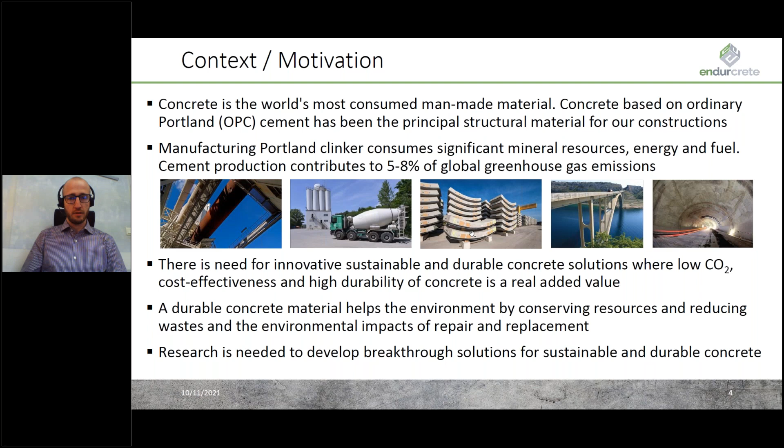So I will just move one slide. Can you move one slide down, please, for me? One more. The other side.

So we developed all these solutions independently first, but the big work of this consortium was also to combine all this technology into final solutions. And you will hear more about each of these technologies later in this webinar. Can we move one slide?

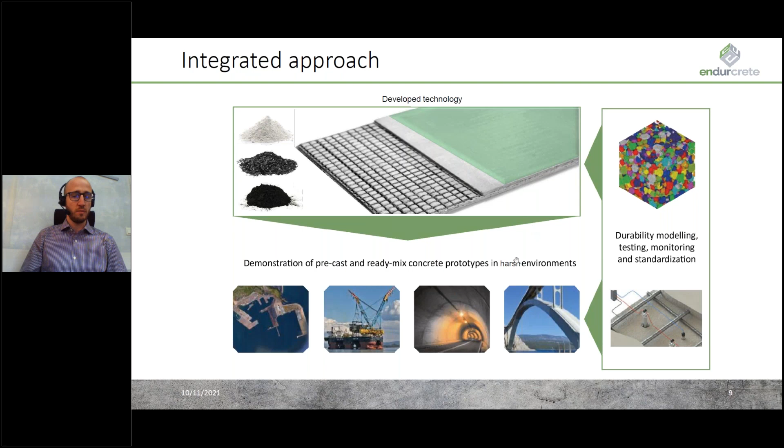And for that, we decided to go to exposure sites that you can see here on the slide. So we have chosen 4 exposure sites for our concrete solutions. One is here a tunnel exposure site in Spain. We have also some seawater exposure sites with submerged elements, tidal zone elements, and air elements. We have one site also in Norway, which is similar, but adding on top frost and very cold climate.

And then we have a bridge site in Croatia where you can see the placement of one concrete panel into this area. The idea is, of course, to validate all what we have developed in the lab into these sites. So you will again hear more from the dedicated partner later on during this webinar.

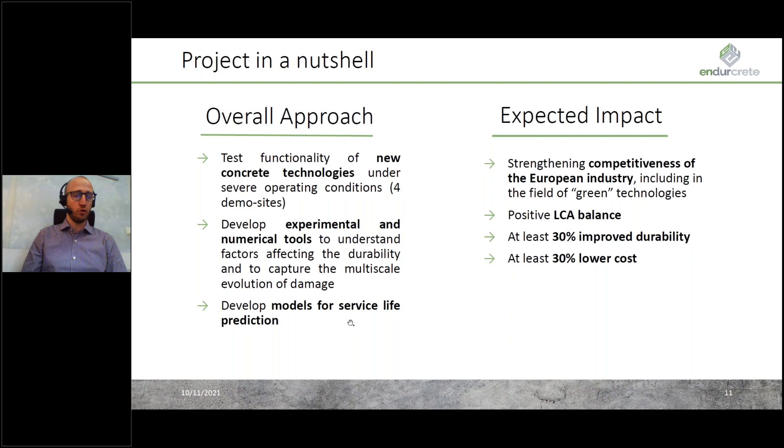So the expected impact is to develop more sustainable concrete and also more durable concrete, as you can see here on the right-hand side, and all of this to be developed together by this big consortium, making also experimental assessment and verification in the lab, in exposure sites, but also developing numerical tools to actually assess our technology also on the computer to have service life prediction.

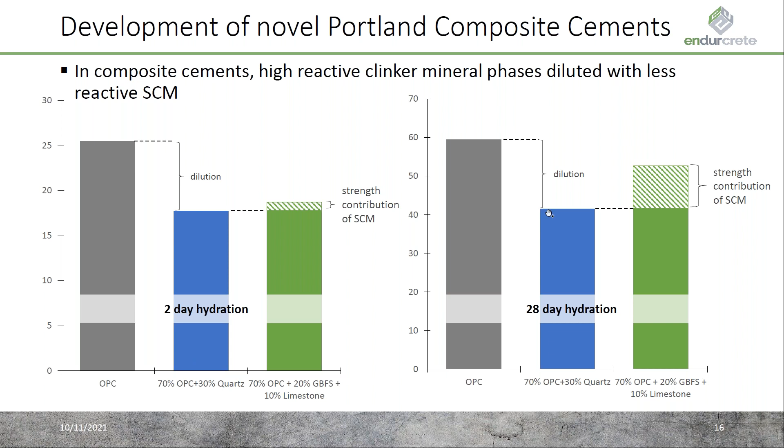If we take reactive materials, which are described in the cement standard, for example, granulated blast furnace slag in a mixture with 10% limestone, we have a very tiny effect on the early strength development by these constituents. But on the right side, you see the graph for 28 days. And after 28 days, we have a significant improvement in strength because of the reactivity of the slag in combination with the clinker and the limestone. But even there is a gap which we have to close.

And the way to close this gap, what we observed, is the technology of separate grinding of the materials. In the last 100 years, most of the constituents in cement were co-ground.

And now where we are looking for lower clinker factors, we have to go in the direction of separate grinding, which means we have to grind every material with respect to the grindability and the reactivity to the best fineness to replace at the end the most of the clinker.

If you work in such complex systems with 3 different materials in grindability and in reactivity, it will take a long time to find the right places where to place your recipe exactly. And there we designed a computer model where we end up with the result that, if we find the right fineness of the material, we can replace 40% of the clinker by a mixture of 30% slag and 10% limestone without significant impact on the cement performance.

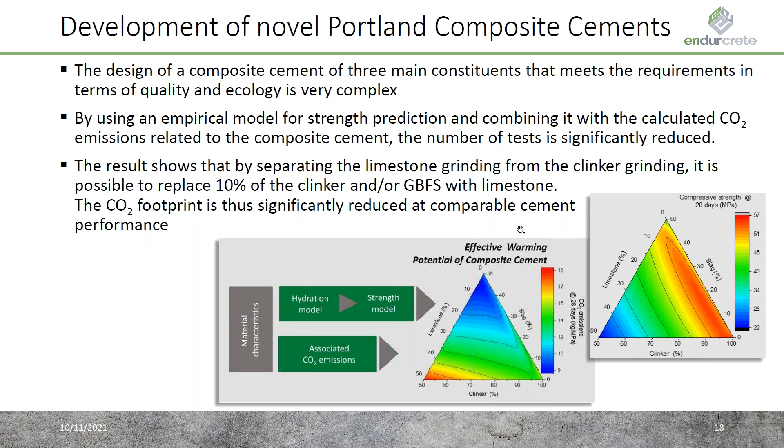And at the end, I would like to show you here the result when it comes to recipe and to the strength development in our project work here. And these are the CEM II/C-M cement and the CEM VI cement, which we then delivered to the partners in this project for all the tests and durability aspects tests and for the demo sites, where we will get the presentation now from my colleagues. That's from my side for the moment.

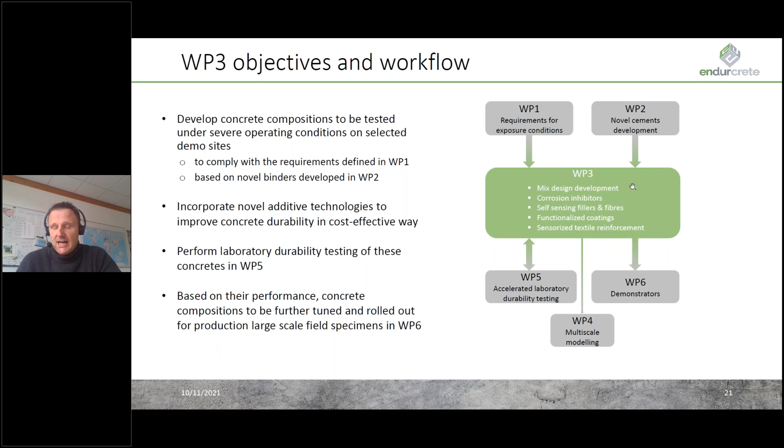This concrete was then tested in work package 5 for durability in the lab. And then we upscaled the concrete production in work package 6, produced the elements to be placed at 4 different demo sites. The whole development went into 3 basically simple steps.

In step number 1, what we try to do is to develop EnDurCrete mixes with novel cements only, which were developed in work package 2. And the development of concrete recipes was based on our design and production requirements, which we got from work package 1. And the end result was basically 3 different concrete types containing the new cements: a marine concrete mix, intended to be tested at 2 marine demo sites, one in Spain and the other in Croatia. We have one tunnel mix intended to be tested at the tunnel demo site in Spain. And we have developed one offshore concrete mix to be tested for offshore application at the demo site in Norway.

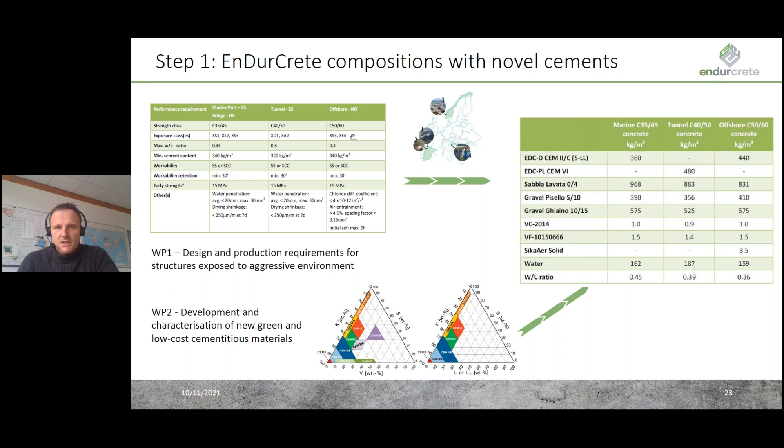Then in the second step, we try to incorporate these novel additions and additives into existing concrete compositions. But before we did that, we try to figure out the impact of these additions on fresh and hardened properties of the concrete. The focus was on workability and strength development, and we try to incorporate a nanoclay corrosion inhibitor and 2 types of carbon-based materials, biochar and recycled carbon fines.

And the study on the compatibility of these additives with the concrete was done by Sika, and what they figured out is that these additions have a negative impact on the workability, and this problem was solved by Sika. They provided tailor-made polymers and admixtures to solve these concrete performance issues. When it comes to the strength development, we saw that the carbon-based materials have more or less no impact, but the nanoclay corrosion inhibitor has a negative impact on the strength development. So for this reason, we decided to only test this nanoclay at one demo site. I'll get back to this on one of my next slides.

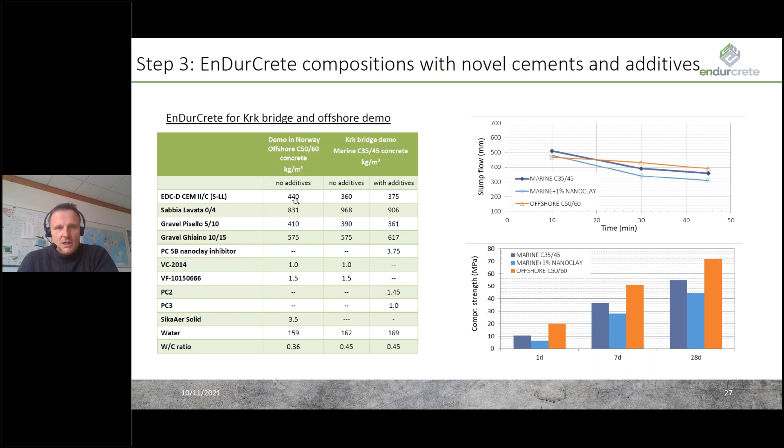When it comes to the offshore concrete, the impact of the nanoclay was even bigger. So for this reason, we decided only to test the composition containing novel cement. This is my last slide, just to tell you that in the scope of this work package, we haven't only developed concrete mix designs, but we also helped with preparation for the lab testing in the scope of work package 5 and the rollout of developed solutions, which occurred in work package 6.

Okay, so good morning, everyone. Today I'm going to explain what we have done so far within EnDurCrete and the nano inhibiting additives for corrosion. iBox is a consulting micro SME located in Valencia, Spain, and we are focused on developing maritime port technologies through two research and development areas. The first one is advanced materials, and the second one is wave energy.

All this activity has granted iBox recognition from the Spanish Ministry of Innovation with the Innovation Seal since 2015. Our product is a corrosion inhibiting additive, and the knowledge on these nano inhibitors is based on the development of a former company called CIES Infraestructuras, which disappeared. But before disappearing, we signed an agreement with them in 2014, where iBox would be in charge of all the technological development and exploitation of the corrosion inhibiting additive.

Our inhibitor prevents the occurrence of corrosion processes in structures exposed to marine environments or in areas where de-icing salts are used. We achieved the Spanish patent, which was published in May 2019. This is the full background, and now let's go to the project.

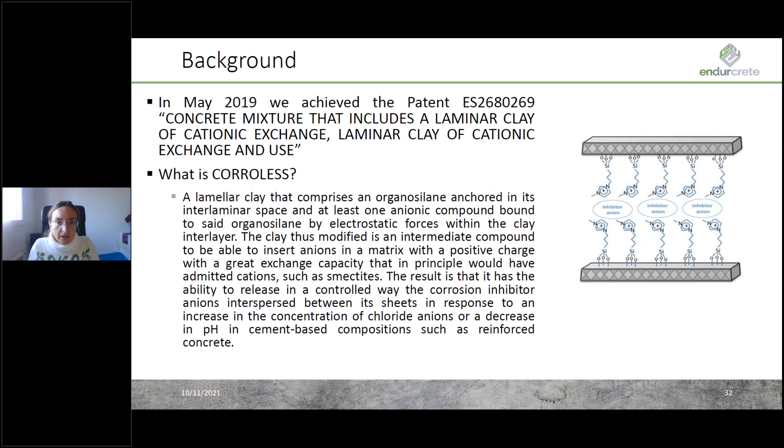iBox participated in task 1. During this task, we reviewed the requirements of regulations specifically for the marine environment. Our main task was in work package 3. We were leading task 3.1, named Development and Optimization of Smart Corrosion Inhibitors based on nano-modified clays. The aim of the task was to develop and optimize the novel additive to be implemented in concrete mix designs, developed specifically to comply with the requirements defined in work package 1.

For a competitive product, the inhibitor had to be a maximum of 1% of cement weight. The price will be less than current commercial solutions, around €2 per kilogram, and the performance will increase the lifetime of the concrete, or the time it takes corrosion damage to appear, up to 3 times.

During the task, the goal was to optimize the proportion of modifier and corrosion inhibitor to fit the concrete requirements and not modify the hydration kinetics of cement, which was a problem. In this sense, with the help of Sika, we reduced the amount of silane modifier and anion corrosion inhibitor, and it was possible to prepare a product. Out of 7 samples, we achieved 1 sample that did not delay the hydration kinetics of the cement.

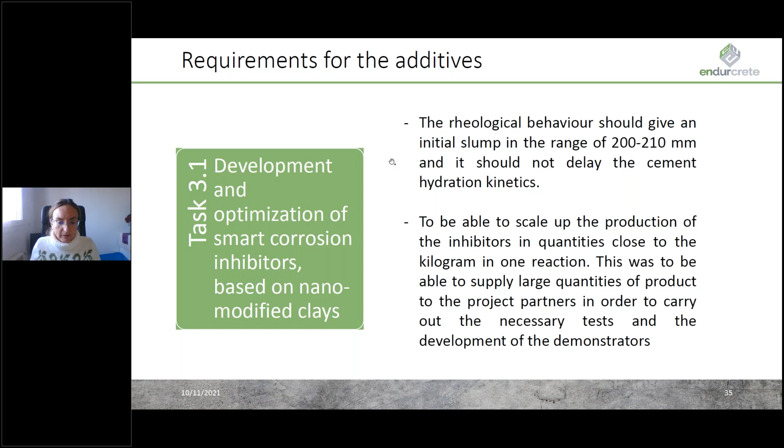And again, the main work was to find the proportion of modifier and inhibitor so that they were optimized. So during this work package 3, the technology was tested in concrete, and it was proved with anti-corrosion properties and did not have any negative effect on mechanical resistance and other concrete properties at first. But afterwards, it was decided that there were some constraints, and it was only going to be proven in marine environment and not in offshore.

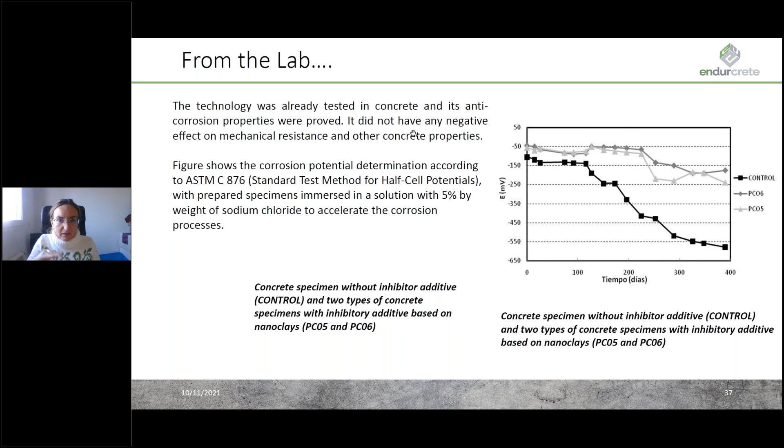To sum up, work package 6 will be explained later by our colleagues from Acciona. But then in this upscaling, the inhibitors were ready, and it was time to start with the pilot scale. And the first challenge arose during the upscaling, and was that the energy consumption during the production process was high, and we had to optimize that.

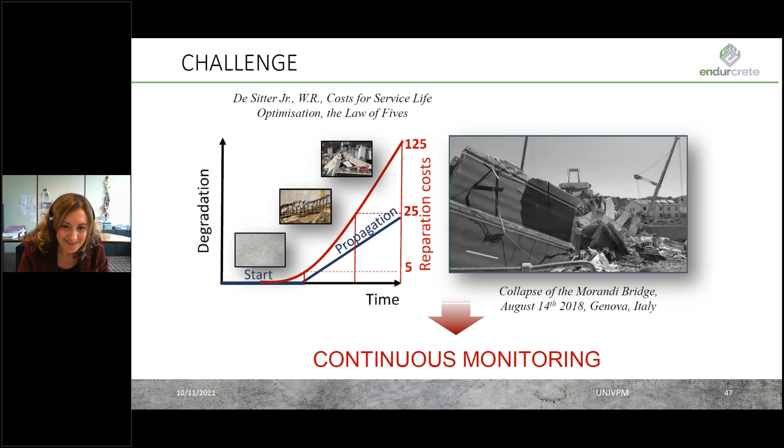Sorry, but I have some problems with the control of the presentation. I'm not able to move up and down. Just tell us when you need the next slide.

Thank you, Max. So in this context, self-sensing is the ability of a material to perceive its own condition, such as cracking, water and aggressive substances penetration, and strain, by simply measuring its electrical resistivity. Compared to other traditional monitoring systems based on a multi-sensor approach, self-sensing concrete is able to detect multiple phenomena in a cheaper and less complex way. Please, next.

The self-sensing concrete properties can be enhanced by decreasing its electrical resistivity with the addition of conductive admixtures. In fact, in this way, giving a higher signal to noise ratio, low-cost instrumentation can be used with the possibility of creating real measurement networks with nodes distributed on the whole structure. Next, please.

Carbon-based additions are excellent for self-sensing concrete. However, those actually available on the market, such as carbon black, carbon nanotubes, graphene, and carbon nanofibers, are not sustainable, very expensive, and sometimes very toxic. Next, please. Next.

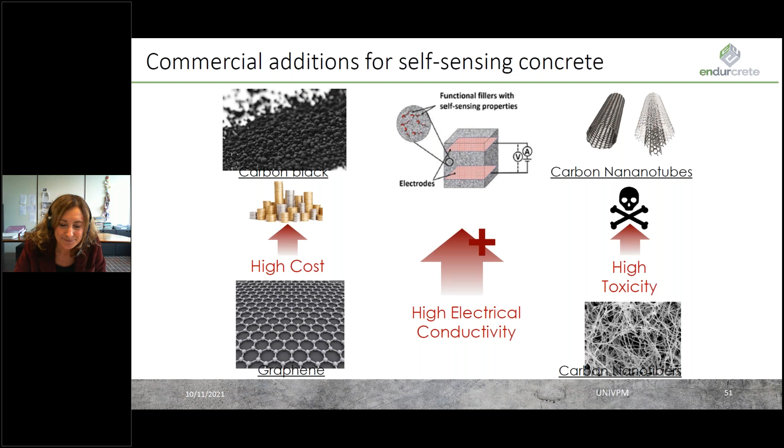Therefore, in the EnDurCrete project, these commercial carbon-based additions for self-sensing concrete have been replaced by innovative, low-cost, carbon-based byproducts, such as biochar by thermal treatment of biomasses and recycled carbon fibers by cutting and milling carbon fiber panels and fabrics. Next, please. Next.

The experimental results have shown that the joint use of these low-cost fillers and fibers does not significantly affect the mechanical performance of concretes. Next.

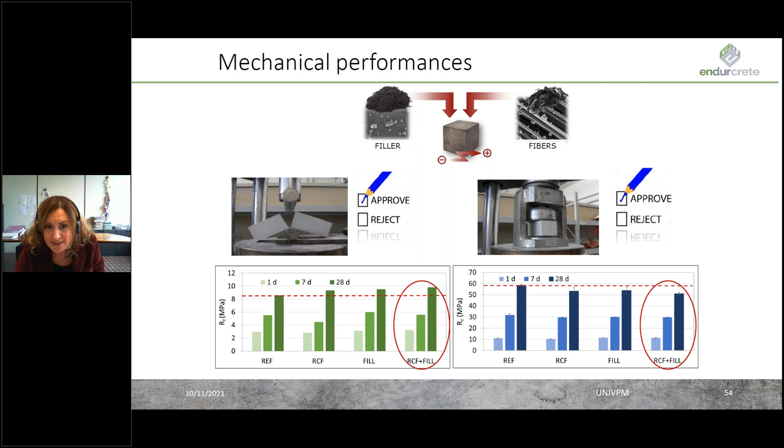They decrease its electrical resistivity, giving the possibility of exploiting the self-sensing performances of concretes in terms of carbonation, chloride penetration, and water absorption.

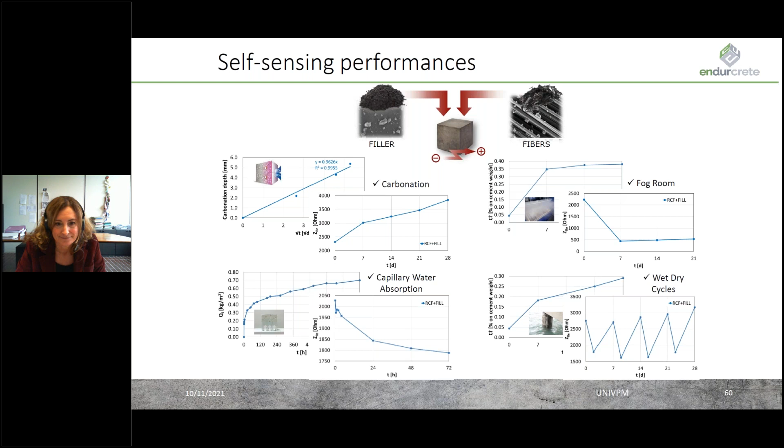A mobile application has been also developed, which after selecting the demo site, the concrete panel, the parameter and the time interval, shows data as a graph that can be saved in a CSV file to be sent via mail.

Results related to the data acquired for approximately 10 months confirm that the signals measured in the panels with conductive additions have a higher signal-to-noise ratio with respect to those measured in the panels without additions, confirming the results obtained at lab scale. The low-cost monitoring system did not show any faults during the demo test activities, and finally, data were not affected by any issues due to the aggressive exposure.

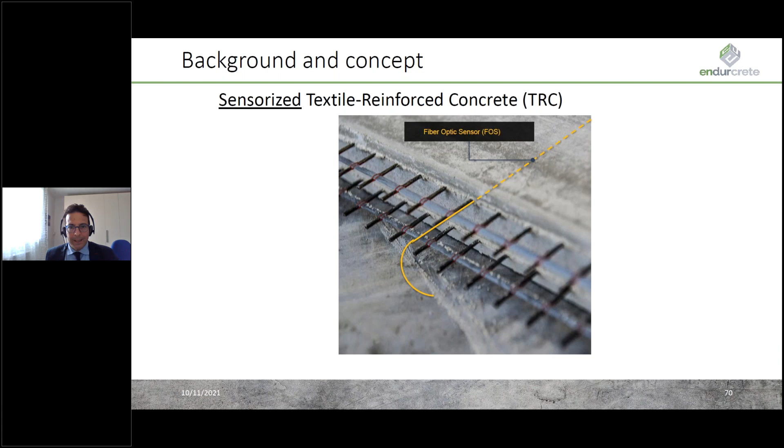Textile reinforced concrete is an innovative cement-based composite material exploiting the non-corrosive nature of fiber materials for realizing slender and durable concrete elements. And in the EnDurCrete project, we further innovated this concept by embedding a fiber optic sensor inside these panels, and so providing them with a built-in structural monitoring capability.

The final goal is to realize a modular sensorized solution like this that you can see in the slide, so that when you are on the field for installation, you just have to connect the two adjacent panels by means of an external optical patch cord.

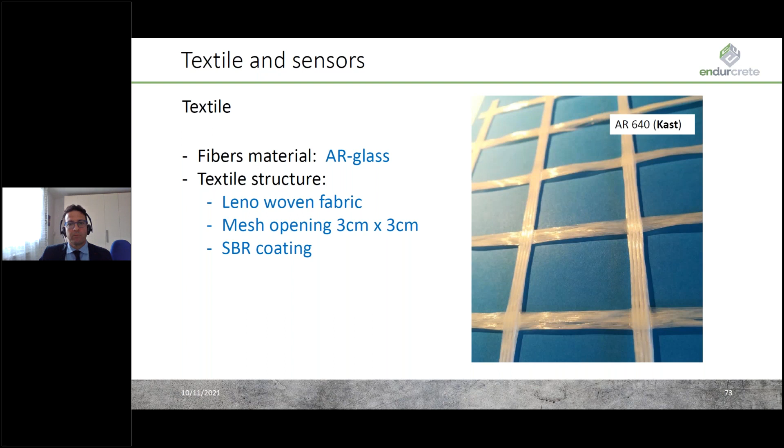Let's have a look to the components of the system. The textile is made of alkali-resistant glass with a mesh opening of 3 centimeters, while the sensor system is made of 2 distinct cables. Here they are. The blue one is a strain-sensitive cable with roughened surface for a better adhesion with concrete, while the red one is a strain-insensitive cable for thermal compensation.

So, in order to set up the production technology and to characterize the performances, we designed and produced 2 samples. The sample A is the reference one, made of ordinary reinforced concrete, while sample B is similar to sample A, but with the replacement of the steel net with the textile.

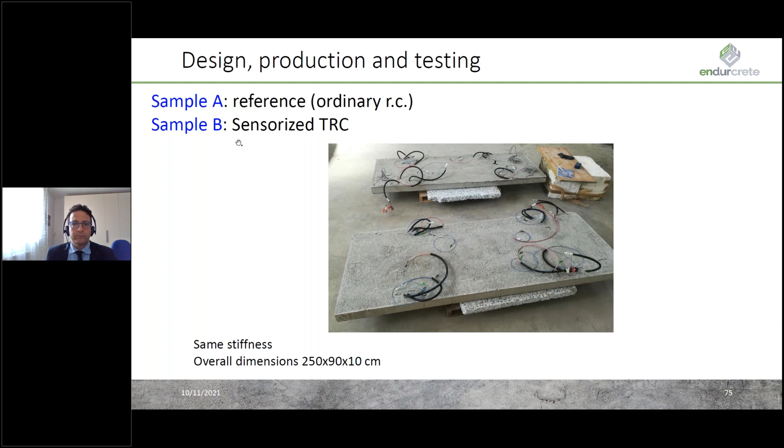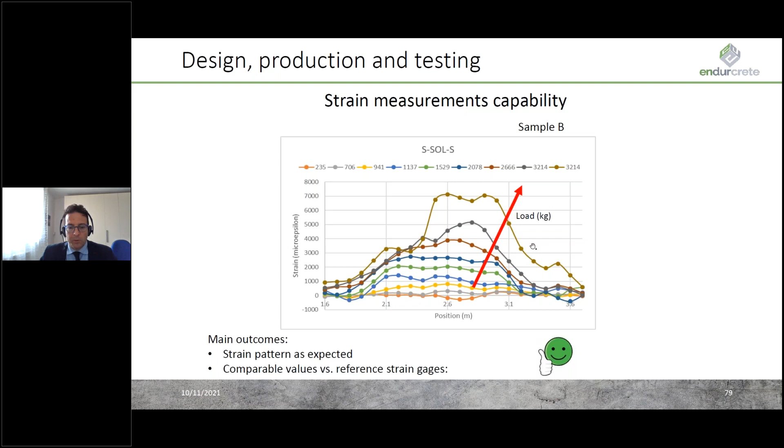The panels were then tested in 3-point bending test. Here you can see some details of the setup, and here the main results, namely the strain profile along the panel at increasing load. We can comment that the strain pattern shape is as we expected it, and also that the strain values we measured are comparable with those obtained by reference electrical strain gauges.

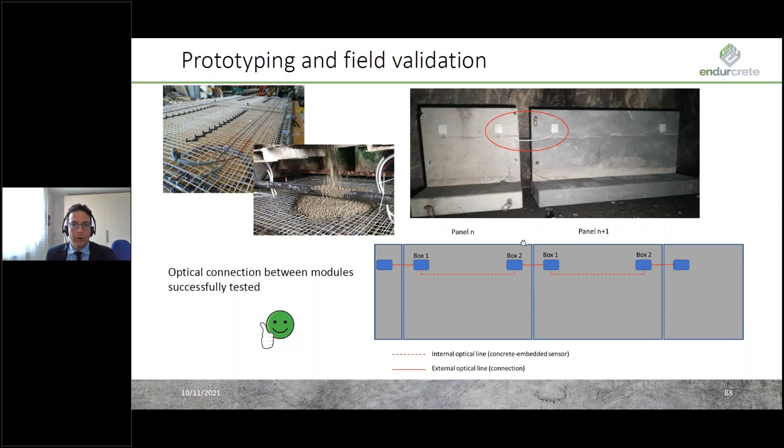So the final step of the work was the production of two prototypes, modular prototypes conceived for a tunnel application. Here you can see some pictures of the production, and here are the two modules placed inside the mining tunnel in Spain. And here you can see the optical connection between the two modules, which was successfully tested. So this was actually a real demonstrator of the concept I mentioned before. So let's go to draw some conclusions.

We developed and tested textile reinforced concrete panels sensorized with distributed fiber optic sensors, with the final goal to develop a modular concept of self-sensing components. We found that the sensors survived the production process and provided consistent data up to advanced cracking stage. Also, the TRC solution provided enhanced ductility and load carrying capacity. And finally, we demonstrated this technology by large-scale prototypes in real tunnel environment.

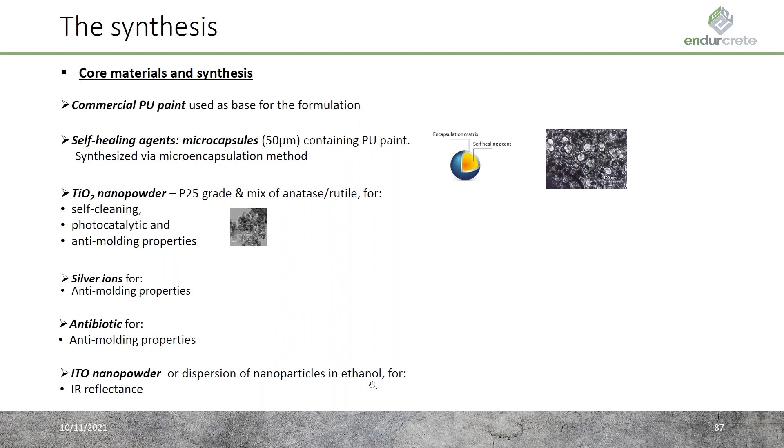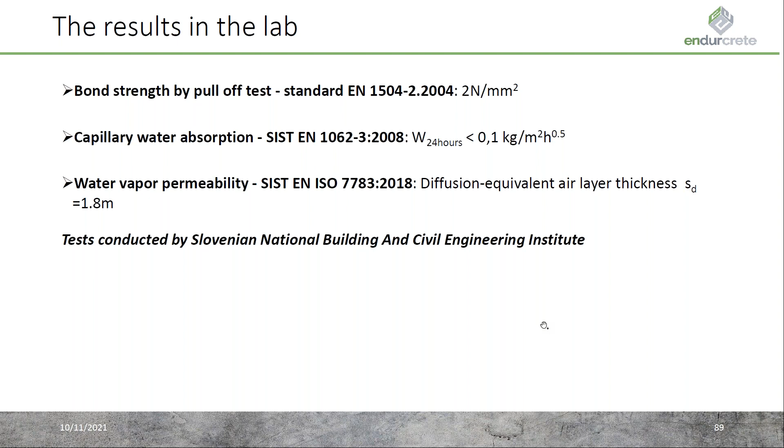Moreover, the Slovenian National Building and Civil Engineering Institute, ZAG, conducted bond strength, capillary water absorption, and water vapor permeability tests on the coatings that showed acceptable results in every case. And finally, the evaluation in real environment is ongoing at the moment.

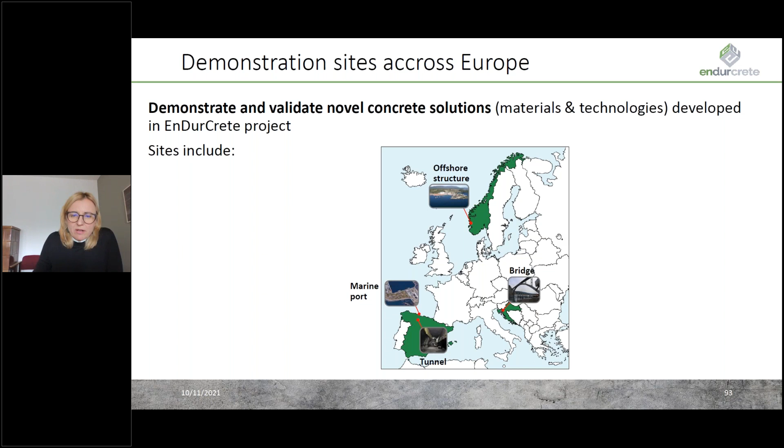Thank you very much, Susanna. First of all, I'm presenting in the name of the large group of partners and people involved in the organization and performance of the demonstration sites, as we will see in the next slide. We have already seen in the first presentation by Arno that we had 4 demonstration sites across Europe, representing demanding and quite different environmentally challenging locations and different types of structures. So we have involved the Mediterranean climate, the ocean climate and Nordic climate, structures exposed to the marine environment, as well as the tunnel structure exposed to carbonation and chemical attack.

The purpose of the demonstration projects, as also mentioned before, is to test the EnDurCrete technologies, which included different types of cements, different types of additions or admixtures used in the concrete production, such as corrosion inhibitors, carbon-based green microfillers, textile reinforcement, and multifunctional protective coatings. We have used at the sites different sizes and types of specimens, so we tried to simulate larger structural elements, but we also added a large number of small specimens which are used for monitoring and the determination of mechanical and durability properties over time.

And at all sites you will see there are different monitoring techniques involved, either through embedded sensors or embedded fiber optics, as well as environmental sensors for local climate monitoring, and then non-destructive and destructive testing of the smaller specimens. The first site I will present is the offshore platform in Norway, which was led by Kværner, now Aker Solutions, and the contributing partners were ZAG, Acciona, RINA, AM Solutions, and Nuatesi System.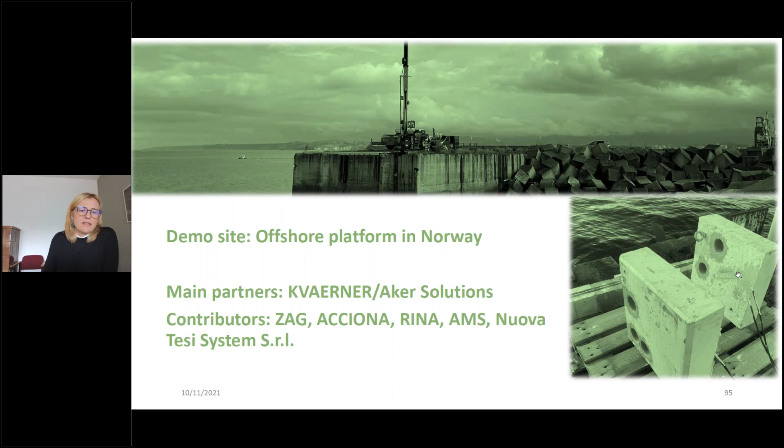The demonstration site in Norway was located in South Norway at a marine location, and it included 2 types of offshore concrete: the EnDurCrete offshore concrete with newly developed cements, CEM II/C-M (S-LL), compared to the reference offshore concrete, CEM I 52.5R plus an additional 5% of silica fume. Just a small note, the reference concrete was a little bit unfair, I think, to the EnDurCrete concrete, but we can discuss it later. The water binder ratio was also very low, 0.46, with relatively high binder content.

We could say there are 4 exposure zones: 3 marine exposure zones, XS1, XS2, XS3, and additionally frost, as in the coldest months the temperature goes down to -8 degrees. There were 15 concrete panels exposed, with a size of 50 by 50 by 15 centimeters. Those panels included different technologies: textile reinforcement with optical fibers, corrosion and electrical resistivity sensors, and different types of coatings. Additionally, there were cubes located in all those different environmental conditions.

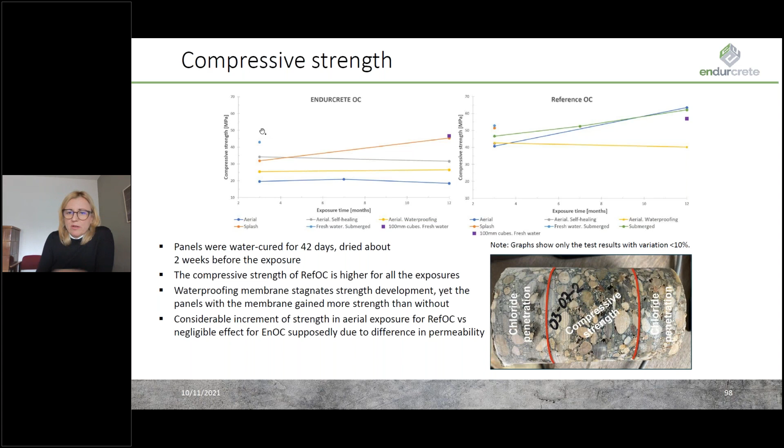So generally, the EnDurCrete offshore concrete had a lower permeability than the reference concrete, and the total air content was varying between 5 and 6%, which is a very good prerequisite to be frost resistant. Chloride penetration tests showed no apparent difference in chloride penetration between the offshore reference and offshore EnDurCrete concrete after 12 months. The highest chloride content was measured in the splash zone and the submerged zone. The treated panels also show minor presence of chlorides up to 5 millimeter depth.

The measurements using the electrical resistivity sensors performed by ZAG did not show any significant corrosion activities. And contact angle measurements of the waterproofing membrane, which were performed by Acciona, showed good wettability of the surface, implying that its hydrophilic properties are as expected.

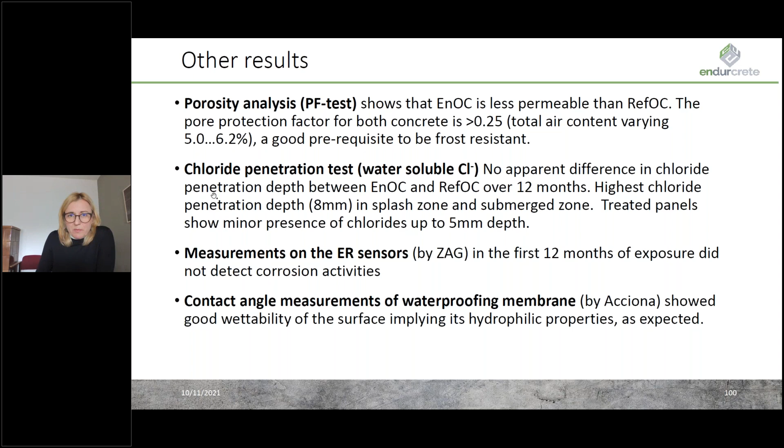The second demonstration site is a marine port in Spain, which was led by Acciona, and contributing partners are Nuova Tesi System, AM Solutions, iBox, Vito, Heidelberg Cement, and Sika. The location of the demonstration site, as you can see, is in North Spain, exposed to ocean climate. The prototypes of the samples were installed in a concrete dock called Port Gijón, El Musel, Spain, supported by the Port Authority and coordinated by Acciona.

We can see on this slide how the steel frame was used for holding the panels in different zones, from aerial zone, tidal zone to the submerged zone. In this site, two cement types were used. First of all, the reference cement was CEM III/A 42.5N, and the EnDurCrete cement CEM II/C-M (S-LL). Additionally, the technologies developed in EnDurCrete were used: polyurethane coating, corrosion inhibitors, and biochar with recycled carbon fibers.

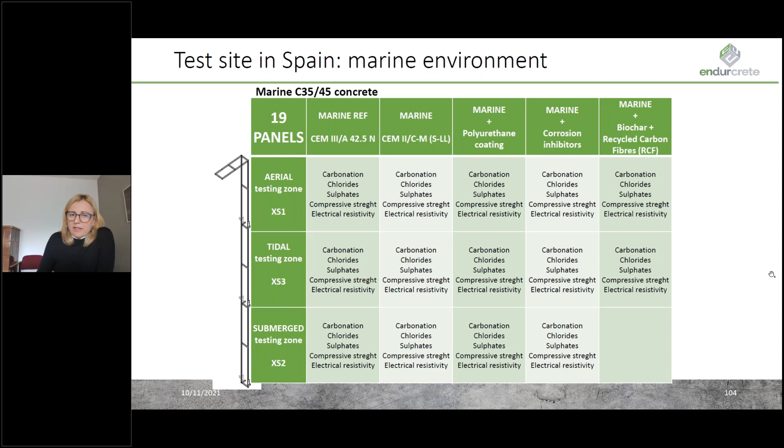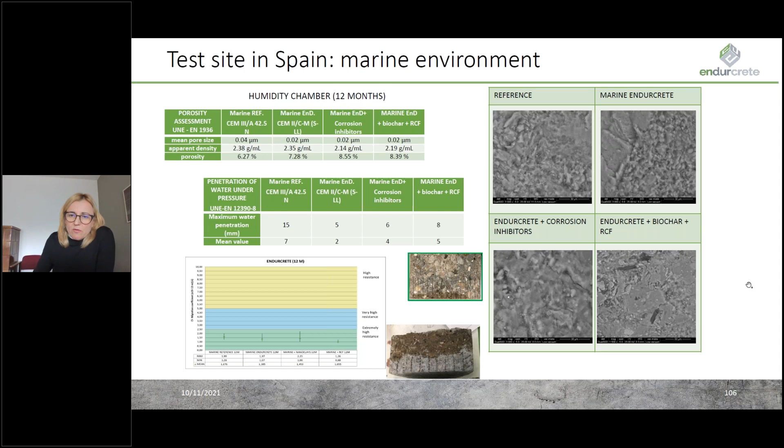So additionally, we can here see the results of the porosity and density and mean pore size. Most important is that both concretes performed really very well. Also, the water penetration was much lower compared to the reference concrete. In the SEM scans, we can see no significant difference in the microstructure, and the overall impression is that EnDurCrete concrete had very low permeability.

So in summary, no sulfate penetration was recorded in splash and tidal zones, and in the submerged zone, the best results were with EnDurCrete concrete with CEM II/C-M (S-LL). The same was for chloride penetration. The better results were recorded with the EnDurCrete concrete in all zones, as well for the carbonation. The bulk resistivity showed a moderate risk of corrosion for the reference cement and very low risk of corrosion for the EnDurCrete concrete. And in the SEM scans, there were no significant differences.

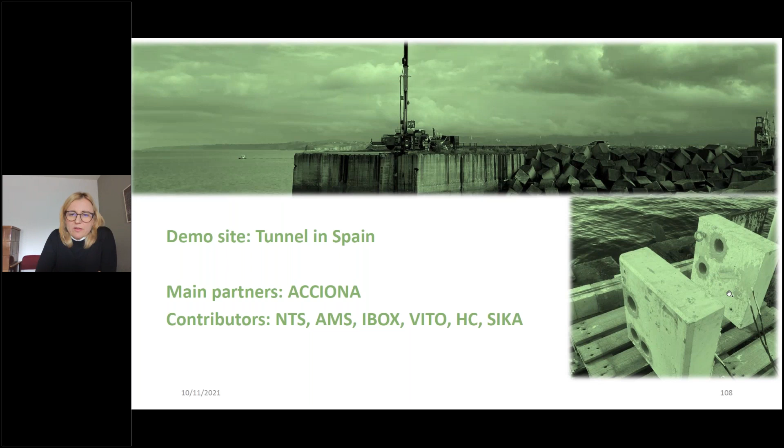The next one is also the demo site in Spain, again led by Acciona and supported by Nuova Tesi System, AM Solutions, iBox, Vito, Heidelberg Cement, and Sika partners. The tunnel is a publicly owned tunnel, which used to be a coal mine, but it's out of service, and it is used now as a research center and for investigation of different excavation techniques, spraying, shotcrete, etc. We have used it for placing our tunnel elements, as Paolo has presented already, representing the exposure classes XD1, moderate humidity, and XA2, moderately aggressive chemical environment.

We can see here the preparation of the samples. The preparation included the usage of the textile reinforcement and fiber optic sensors. This is the two-stage loading before placing the panels in the tunnel. As well, initialized cracks were performed in order to test the computer vision technique for detection of the crack location and the width. And as well, the device for measuring the surface roughness was applied.

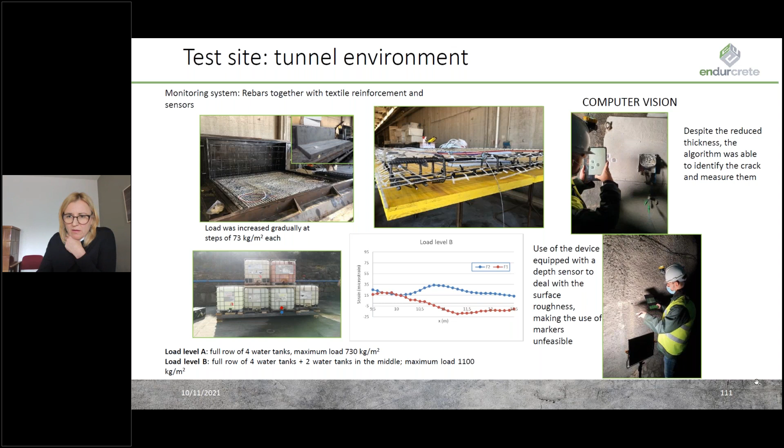to the frost. And as well, the penetration of the water was much better, or no penetration at all recorded with the tunnel EnDurCrete concretes, as well with the addition of the biochar, comparing to the tunnel reference concrete. No sulfates penetration was found in any of the mixes, and as well the SEM scans showed no significant differences at the microstructure level.

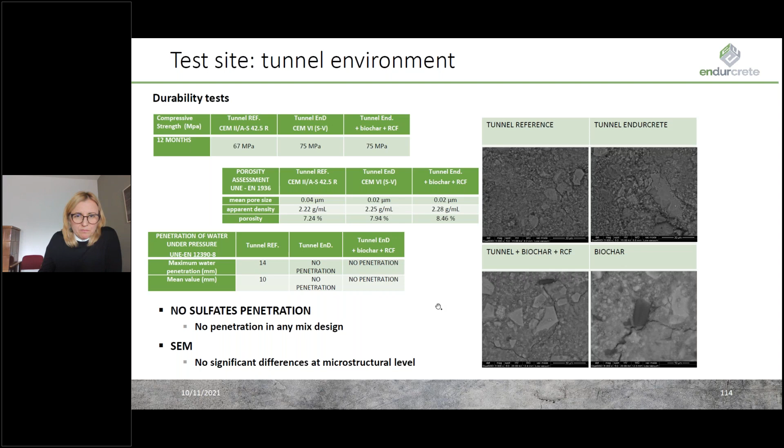The 5 materials were used at this site, so there were 3 cements, both presented in the tunnel and the marine environment, so 2 EnDurCrete cements, and additionally 1 set of samples was coated with 1 polyurethane coating, and we had 2 reference cements as well used for the marine and the tunnel environment. 2 types of corrosion sensors were used, so coupled multi-electrode system and electrical resistivity, which will be shown on the next slide. We have 3 zones of exposure: submerged, tidal, and the splash.

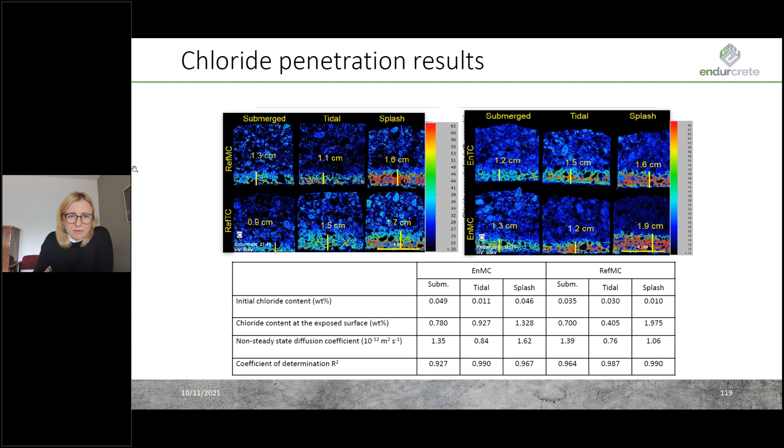So what we can conclude: there is no significant corrosion activity to make a final conclusion about different materials and exposure zones. Only different current fluctuations among different columns, as said, and no evidence of stable anodic and cathodic currents. Very minor differences in durability properties, and we can conclude that new cements are comparable to reference cements, which were CEM II A-S 42.5R and CEM III 42.5N.

And to mention for all our demonstration sites, as you can imagine, we have results after 12 months and after 18 months for Krk Bridge. They are not sufficient to make final conclusions. So all our demonstration sites are continuing measuring and performing monitoring after the end of the EnDurCrete project.

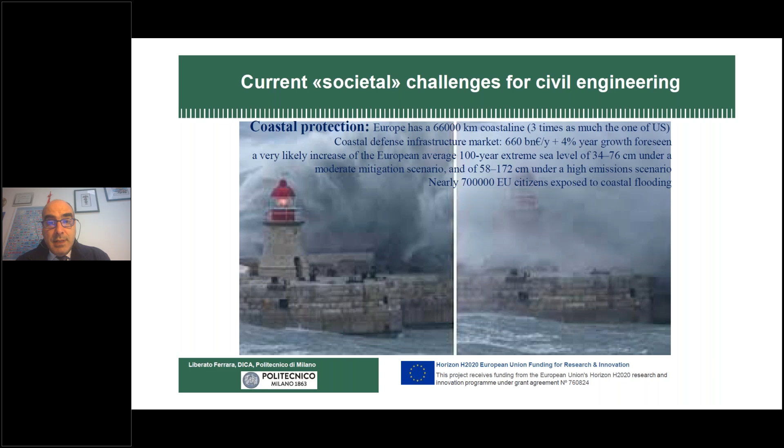And then we have to look into coastal protection, which can be challenged by climate change events. These are events in Malta Island; these pictures are taken from a Malta newspaper. So in a Mediterranean climate, you can have these extreme events which challenge our structures. Consider that Europe has 66,000 kilometers of coastline, and about 700,000 European Union citizens live in areas exposed to coastal flooding. And this is becoming even worse considering the sea rise due to climate change.

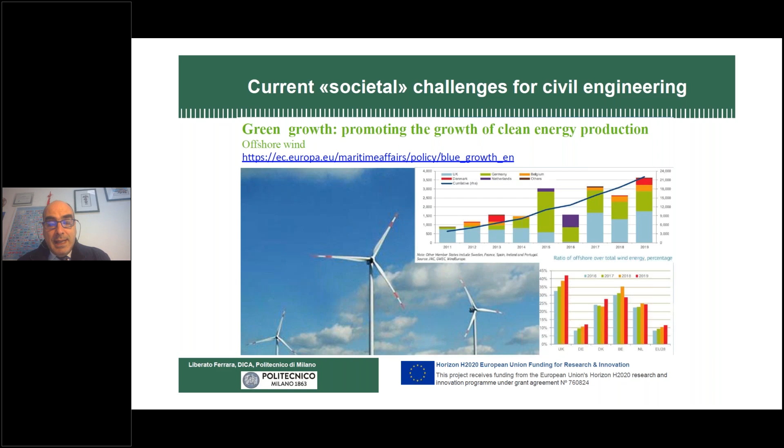Decarbonization goals: we have to make the use of renewable energy sources more efficient and economically viable. These are two specific sectors that we have tackled in our ReSHEALience project. One is geothermal energy. We have several areas in Europe which are producing this kind of energy. There are remarkable examples. For example, last week I was reading at the German pavilion in Expo 2020 in Dubai that the city of Munich is completely autonomous in this sense because it completely goes on geothermal energy. And we have also to go farther with offshore wind energy harvesting, and this is also a sector that we have tackled in our project, together with blue growth.

We live on a planet which is called Earth, but actually 70% of it is made of water, of sea. And only 5% of our economy and of our food, for example, comes from the sea. So there is the need to really take much more from the sea and leave the earth to rest a little bit because it's now depleted. And in the blue economy sector, there are emerging sectors that can really also drive the recovery of the economy and of the society after the pandemic.

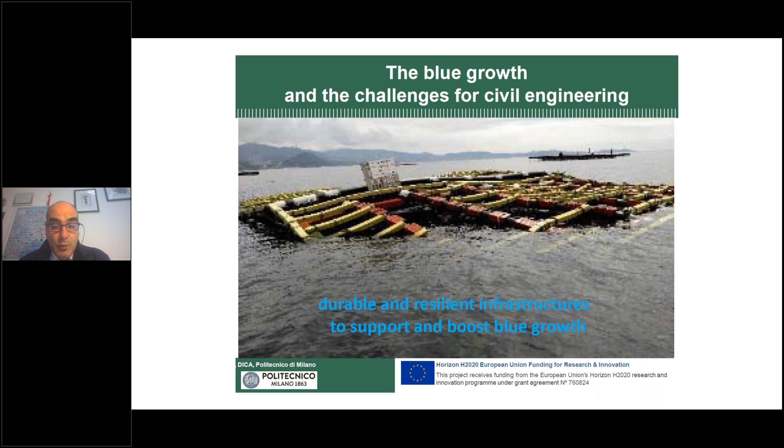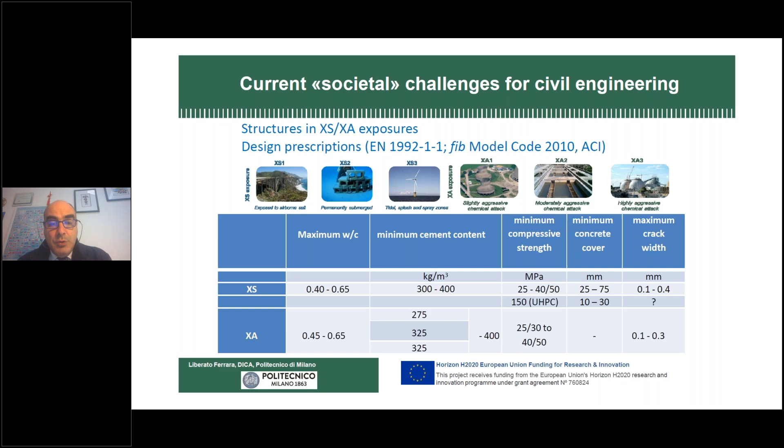So this was the scenario, and when we go to the design codes, we actually find only prescriptions based on minimum cement content, maximum water cement ratio, and so on. But these prescriptions, actually, if we go to modern concrete, high performance concrete, or even ultra high performance concrete, they are automatically guaranteed. So we do not have really a performance-based durability design framework, which can help us also in promoting the innovation in this sector.

So this was the context in which we, as ReSHEALience Consortium, gathered and applied. The project started on January 1st, 2018. We are going to finish in a few months from now at the end of March. 13 partners, 3 linked third parties from 7 European countries. And as you can see, these are the partners of our consortium. We cover the whole value chain of the concrete construction industry, from the producers of constituents to engineering consultancy companies to precast construction, large-scale infrastructure companies, and large-scale end users. And we have 6 universities in the consortium, and I am the coordinator with Politecnico di Milano.

So, as I said, our goal is to work on product process concept. We have developed the concept. It's not a branded material or a specific material, but it's a mix design concept, the material concept. We call it ultra high durability concrete, and the methodology for durability-based design in order to tackle our problem of designing longer lasting structures in extremely aggressive exposures. Sorry, there was a movie here which was made in our lab.

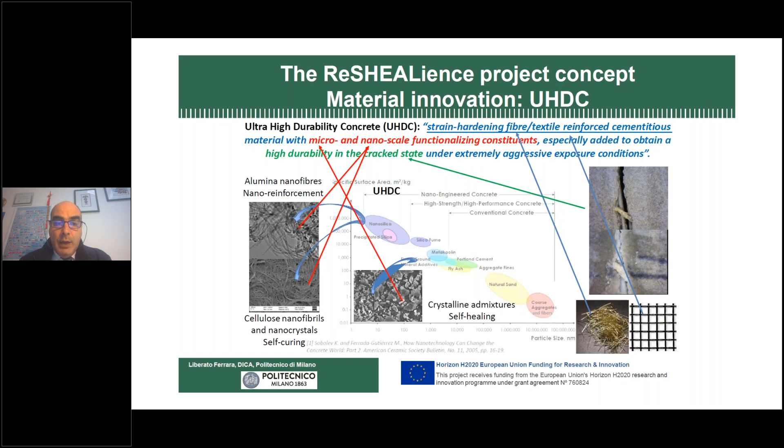We started with technology of ultra high performance concrete, ultra high performance fiber reinforced concrete, and we engineered its composition using micro constituents, nanoscale constituents to promote self-healing, to promote self-curing, to have a very extreme, I will say, control of the crack width, because we were able to control width of our cracks in the range of a few tens of microns. We use alumina nanofibers, cellulose nanomaterials, and crystalline admixtures for self-healing.

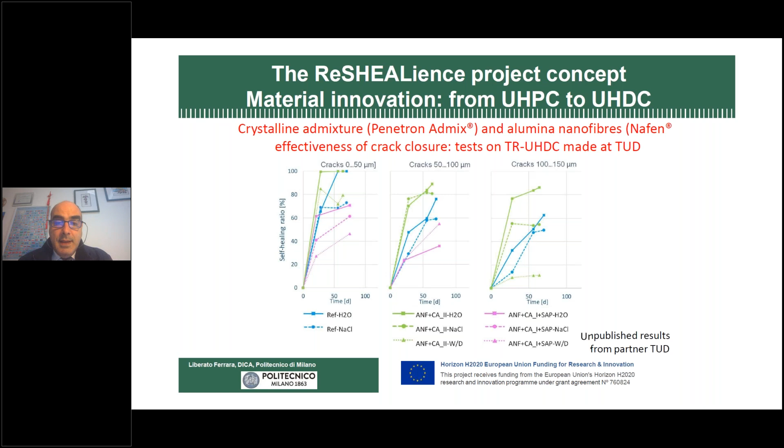And you can see here some visual images of the crystalline growth in the cracks, which are completely closed, and the comparison of the technology that we have used in our project, the green curves in these graphs, with other technologies to promote self-healing, for example, the superabsorbent polymers, which are the purple curves, or the reference material, which are the blue curves. So in our case, it was always much better. Also for large crack widths, more than 100 microns.

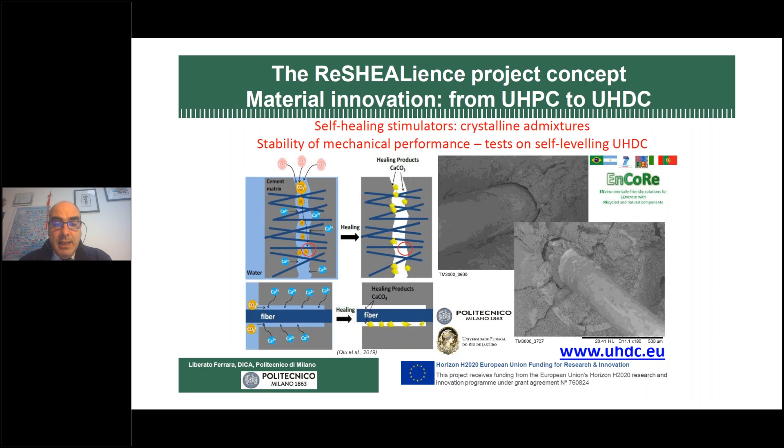We also checked, because we wanted to explicitly exploit this in the design, what self-healing means in terms of ability of the material to maintain the mechanical properties a long time. So with repeated cycles of cracking and healing, which is what the structure will experience. And we also went into microscopic investigation to check the efficiency of the healing on the fiber matrix bond, as you can see from these graphs. And these are some images of the effects of the nanomaterials, the nanoalumina and the nanocellulose.

We built, and we are currently monitoring, 6 full-scale pilots. 2 of them are in Italy, in a geothermal site. 2 of them are in Spain. 1 is in Ireland, and 1 is in Malta. We tackled the sector that I said before.

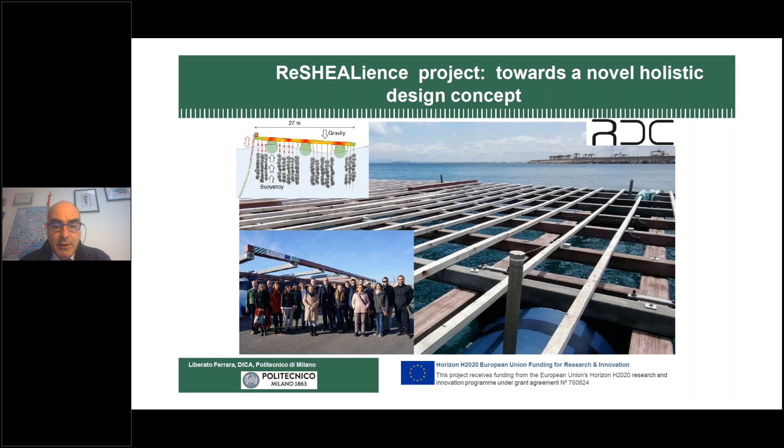This is the second pilot, the floater in scale 1 to 2 for an offshore wind tower. It has been anchored to a quay in the harbor of Sagunto, still in Spain. Rover Maritime is responsible for this together with University of Valencia, whereas for the other prototype, the company RDC was responsible. And we visited it.

You can access the pilot with a bridge made with the same material, and you can go inside the pilot to inspect, and there are different sensors installed to check the healing, to check the corrosion of the ordinary reinforcement. You can see we visited it on the occasion of an international conference, several people going up to this ultra high durability concrete bridge that we built.

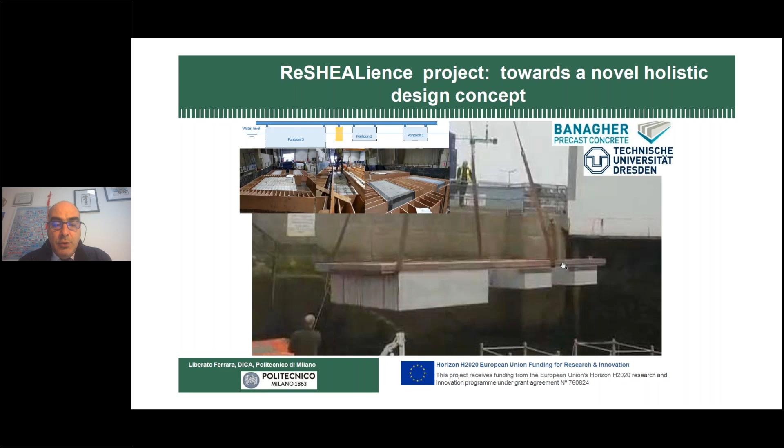This is the Irish pilot. It's made of 3 different cells. The first one, the biggest one that you can see in the forefront of the picture, is exploiting regular concrete technology, whereas our material, in this case, the technology is ultra high durability matrix with textile reinforcement, whereas in the previous pilot it was dispersed fiber reinforcement. You can see the saving of material that you can have. Obviously, you cannot go too low because of the buoyancy requirements.

The pilot is now in the Galway Harbor. These are some of us visiting it, and you can see here where the mouse is indicating, there is a box where all the sensors go with their cables and they wirelessly transmit to a control unit, which is in the offices in the harbor.

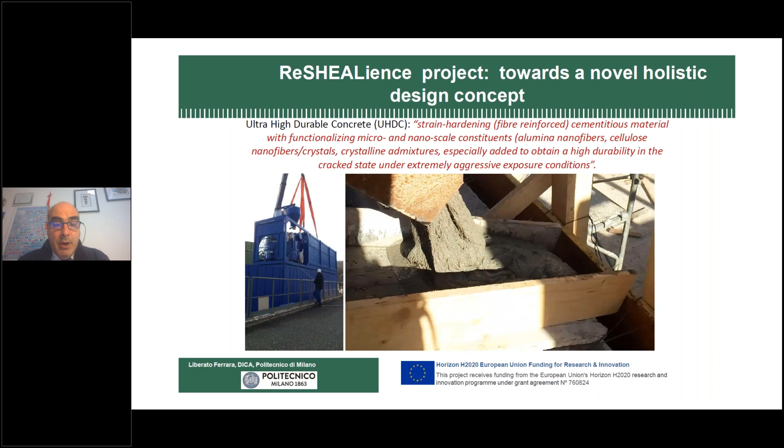We built them on the site with a dedicated batching plant, which was brought on site. And this is a basin for the geothermal drilling mud in service of the geothermal drilling platform. And in this other case, this is a pilot meant to keep the water from the cooling towers.

We designed this basin with 3 different technologies. We have ordinary reinforced concrete, 10 centimeter thickness. We have cast in place ultra high durability concrete, 6 centimeters thickness, and we employed a partially precast solution. You can see this during the construction.

This was February 2020. The slabs were precast with holes and the cast in place columns in between them. The material also filled the holes and realized the connection. But in this case, the slabs were only 3 centimeters thick. So we have a 70% saving on the material.

And these are some images of the finished basin and of load tests that we have been regularly performing and monitoring. You can see here the basin is completely filled, and you have some pictures here on the right. It's a little bit blurred, but it's the degradation of ordinary concrete as exposed to the sulfate water, and our UHDC material, which is very smooth and completely sound.

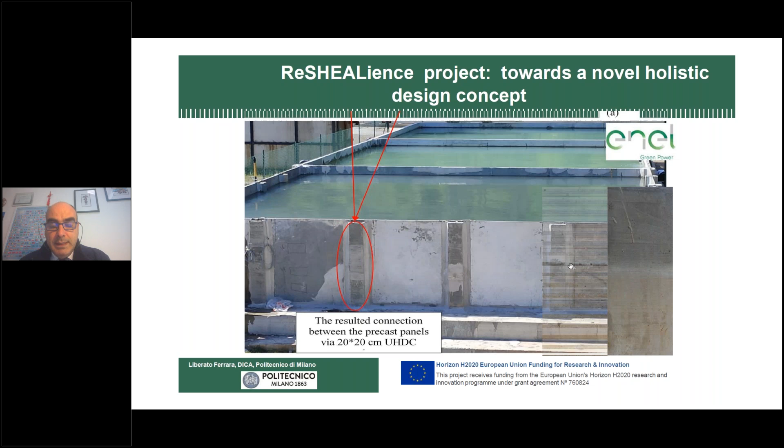And some pictures also you can see here, an image of a quite large crack, a shrinkage crack, which was completely healed with no detriment to the water containment capacity.

Well, actually, if you go to the mix design, people may complain that we are using a lot of cement and this may not be good for sustainability. But actually, this is not the correct way, in our opinion, to look at it. You do not have to look at the composition per cubic meter, at the carbon footprint per cubic meter. Actually, if you consider an ordinary concrete with 350, 400 kilos per cubic meter of cement, to realize 1 meter of the wall of the basin, which is 10 centimeters thick, you need 40 kilos of cement.

But in our case, with this mix design, to realize 1 meter of the basin wall, which is just 3 centimeters thick, you need 18 kilos of cement. So in the end, you have more than 50% saving on the use of the material. So think of the structural unit, think of the functional unit, and not of the cubic meter of cement. And most of all, let us start thinking in terms of life cycles. We may have a higher construction cost, but in the end, with reduced maintenance, the life cycle cost can be greatly improved.

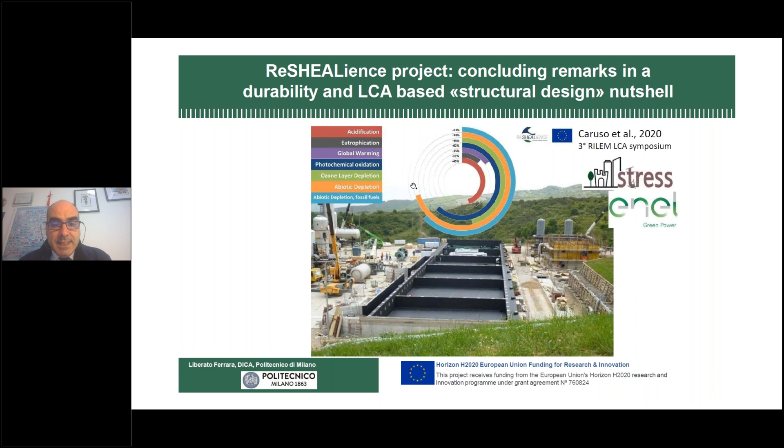And this was demonstrated for our structure, with significant savings on the life cycle indicators. So in the end, we embed the degradation models into the structural design, being able to arrive at the prediction of the end of life. Obviously, with this material, your end of life is quite long, more than 100 years. So you may ask, what does it mean, more than 100 years? Because in that time, the contractor, the owner, the end user may change their needs. So we have also addressed the recyclability of our material.

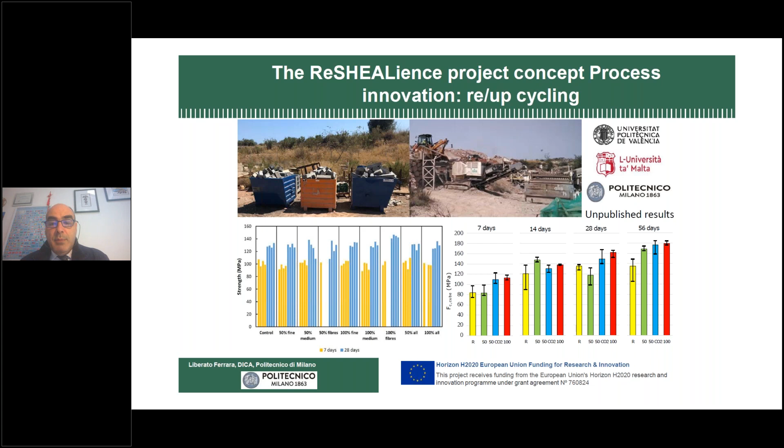I would say we were a zero waste project, because all the specimens which were produced in our lab were completely recycled, and we demonstrated, if we look at the graph on the right, with reference to the parent material, the yellow one, all the materials employing recycled material as aggregates were able to guarantee comparable or higher compressive strength, and flexural strength as well. These are results of a PhD thesis going on now: we are also able to guarantee the persistence of the healing capacity upon recycling.

As an educator, as a university professor, I am quite proud and happy to say that we offered about 20 young engineers and young scientists a starting career opportunity with PhD, researcher, and assistant professor positions in university. And we trained, only in Milano, more than 40 students with their master thesis on this topic, because I think this is also the way to have this material widespread in the market, training the future engineers to confidently use these materials.

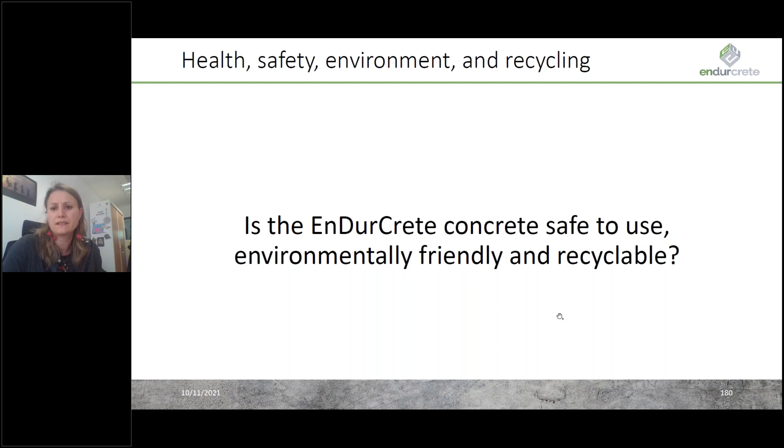So today I will speak about the health and safety aspects, and also the environmental impact and the recycling aspect. It's an important issue to take into account when we create and use new materials. So for that, we have to, sorry. The next slide, please. Thank you. So we have to have a global vision of the whole life cycle of the product to address these three main topics: health and safety, environmental impact, and the recycling aspect. So for that, we have to analyze each step separately and see their role and impact.

On the next slide, please, we see that, for example, for the health and safety aspect, we have focused the analysis on the production step. In the EnDurCrete concrete, new materials are involved, such as nanomaterials. So it's important to update the risk assessments regarding the use of these new materials. I've also looked at the regulation regarding the use of this product. And like that, we are able to update the risk assessment, adjust the protocols, propose some means of prevention for worker exposure, adapt the training of the workers, and propose some guidance to be sure that the product can be handled safely.

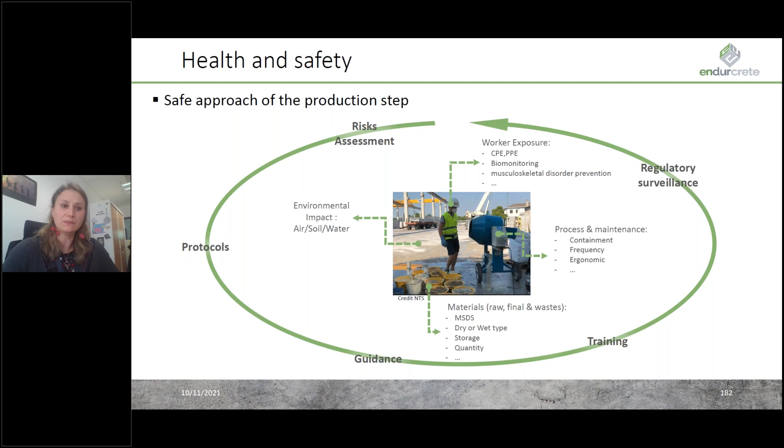Next slide, please. So the second pillar that we analyzed is the environmental compatibility of the product. For that, we focused on the two last steps of the life cycle of the product, the use and the recycling scenarios. It's important that the product is in compliance with environmental law and avoids any leaching of organic pollutants or heavy metals from the material to the environment. So tests have been performed on the different EnDurCrete concretes, and we have seen that in all cases the products are compliant with the regulation, and we don't see any contamination in the environment. And the last point is the recycling aspect.

On the next slide, please. So for that, it's important to know that after their service life, concrete structures are usually demolished and crushed into pieces, and then the rubble can be reused as aggregate in a road base, for example, or in new concrete. So we have to check that the EnDurCrete concretes are also suitable for these recycling practices. So next slide, please.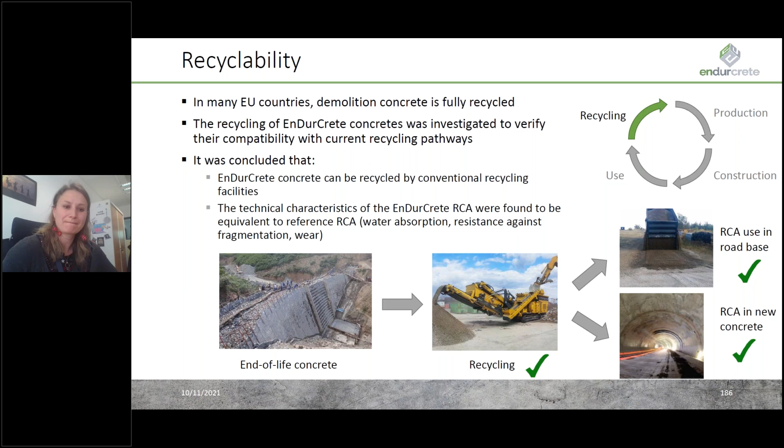Thank you very much, Cecile. The next topic on pre-validation of the technologies will be presented by Professors Chidevert and Alissa. Go ahead. Yes, thank you very much for the introduction. So my name is Alissa Machne, and I will guide you together with my colleague Claire Chidevert from NTNU through a durability-related part of this session. The two topics we are talking about today were not just performed by NTNU, but also by CEA and ZAG, but Claire and I are the presenters today.

I want to warn you first that this section might be a little bit more interactive. We have two polls up for you shortly, where you are asked to give us your opinion on the questions we ask, to make this a little bit more interactive. So be prepared. So first of all, I'm going to talk about carbon. No, please not the poll yet.

First of all, I'm going to talk about the carbonation part of the durability investigations in the EnDurCrete project. Within the project, CEA developed a model, a carbonation model amongst others, and ZAG and NTNU were asked to provide experimental data to calibrate and verify this model. So in the beginning of the project, these three partners were sitting together discussing what we should take into account, what parameters the model needs, and how we can obtain these parameters from laboratory tests in the best possible way. So there were a lot of discussions on various parameters and how to test them.

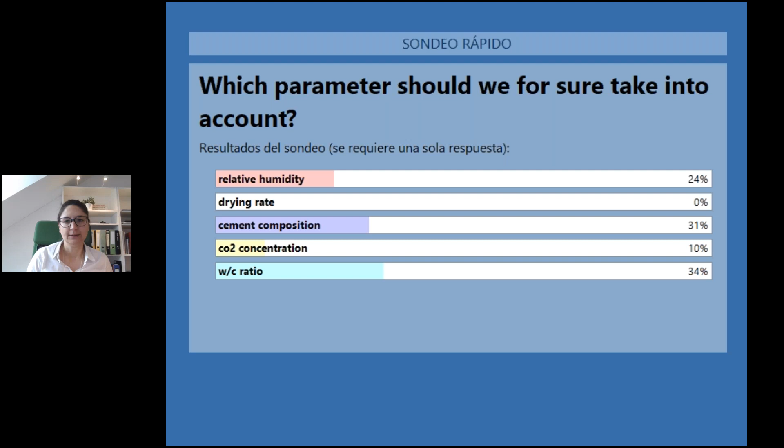Okay, we can proceed with the presentation, because instead of just giving you one answer, and spoiler alert, there is not one answer to that question, I would rather show you how we approached that when we were sitting together in the beginning of the project discussing that. So what we did is that we got mortar and concrete prisms. They were prepared by Acciona and then were sent to the NTNU and the ZAG laboratories.

And half of these prisms we cut in thick blocks. Of the prisms, we know the cement composition. For sure, we have a cement producer on board in this project, but also the mortar and concrete recipe or mix design. So aggregate types, particle size distributions, the water to cement ratio, the admixture content, all of that was known. So half of these prisms we cut into thick blocks and we carbonated them at 60% relative humidity and 1% CO2 concentration for various times.

And at these various carbonation times, we took blocks out of the carbonation chamber, split them, and then on one part, we determined the carbonation depth, as most of you know, with a pH indicator, spraying the surface and reading the carbonation depth, either manually or with image analysis. And the other part, we profile ground inwards, so we get powders from various steps towards the inner of the sample, and these powders were analyzed with TGA, so we got an idea about the portlandite content and the calcite content at these various steps.

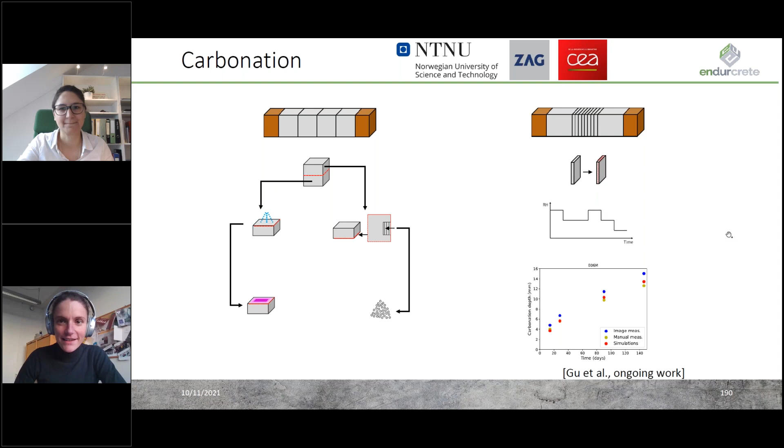Thank you, Alisa. Do you change the slide, Alisa?

Yes, thank you. So besides carbonation, we also looked into the chloride ingress in concrete, and the concretes developed in EnDurCrete. And as most of you know, chlorides originate either from seawater or the de-icing salts, and they can ingress into the concrete cover. And when they reach a sufficiently high concentration in the vicinity of the reinforcement, they can cause corrosion. And it's actually this reinforcement corrosion which is considered one of the main degradation mechanisms for reinforced concrete exposed to seawater or de-icing salts.

And if our EnDurCrete concrete is supposed to be durable, it has to have a good resistance against chloride ingress. So I just have a couple of slides where I'm going to take some examples, and we're going to look into the concretes which have been exposed at the Krk exposure site, which Irina already introduced to us. And we scanned these with a micro-XRF after they had been exposed for 1 year. And this exposure site, as some of the others used in this project, has the advantage that we can test

different exposure zones. And again, a little poll to check whether you're following and you're all awake. And Irina actually already gave a little hint on the correct answer to this question: which exposure zone do you think is most susceptible to chloride ingress? Is it the submerged zone, the tidal zone, or the splash zone? So could you launch the next poll? Thank you. So please vote where you think you would have the deepest chloride ingress after 1 year of exposure. Would it be in the submerged zone, the tidal, or the splash zone?

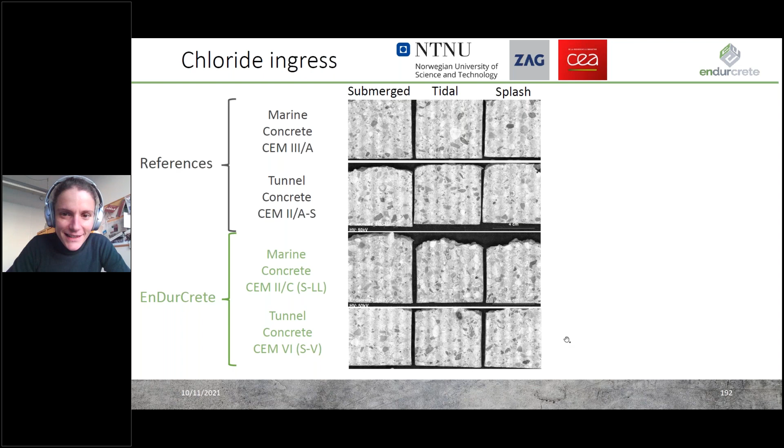So if we go to the next slide, then we can see our chloride maps. I have to say that all these samples have been exposed from the bottom to chloride, so chlorides have ingressed from the bottom part of these samples inwards. And in order to make the ingress depth of these chloride maps a bit clearer, I've added these little white bars that give you an indication of how deep the chlorides have penetrated into the concrete, and also an indication of which depth they represent.

And if we compare the columns, the submerged samples, the tidal, and the splash ones, we can see that the samples exposed to the splash zone tend to have the highest ingress. So the splash seems to be the worst zone, at least at the Krk exposure site. If we then compare the reference concretes, the 2 top rows, to the EnDurCrete concretes, there are actually no large differences. And that's also what Irina presented from the exposure site. Our EnDurCrete concretes, which are more environmentally friendly, are performing similar to the references. So that's a very good thing. They're more environmentally friendly, but as resistant as the references to chloride ingress.

So this is a sneak peek of results. And as Irina also said, these are results after 1 year, and we're very interested to follow this up together with Infraplan and ZAG at this exposure site, and see how the chloride ingress develops over time. And we will compare that to laboratory experiments we've done in parallel on these concretes as well. And we want to compare that with the model CEA has developed for chloride ingress, because they have developed a very advanced multi-ion model, which could account for these different exposures, because it also accounts, for example, for leaching.

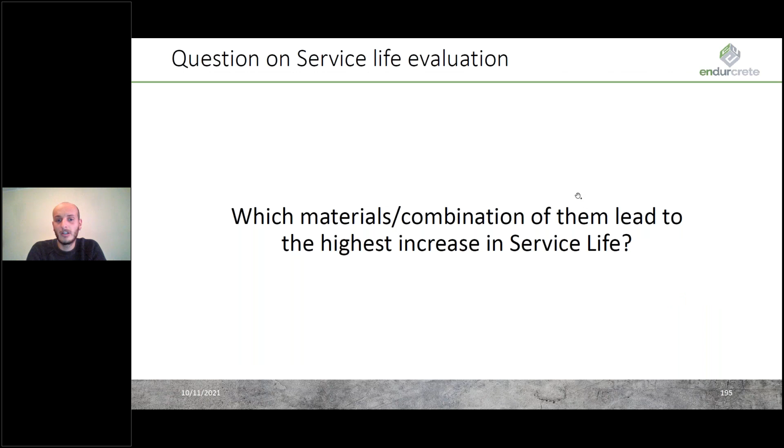So basically, the very first question that we have to think about in order to speak about this topic is which materials or combination of them lead to the highest increase in service life. In the first case, we analyzed the concrete diffusion, and in order to do that, we analyzed 2 different kinds of structure. The first one is a reinforced concrete pier, and the second one a reinforced concrete dissipation box, both in a marine environment.

Basically, here we analyze the critical pile element for the first structure and the critical external wall for the second one in order to evaluate the service life of this structure. So in this case, we obtain the evaluation of the service life.

And in these two different figures, we can see that the use of the materials described so far, like the EnDurCrete, and the coating developed during this project, and the EnDurCrete with the use of the nanoclay inhibitors, lead to an increase of the service life of both structures, with an average increase of 16% by the use of the EnDurCrete concrete. And we can go up to 25% using also the coating, and using the nanoclay inhibitors, we can have a huge increase, up to 42% increase of service life on average.

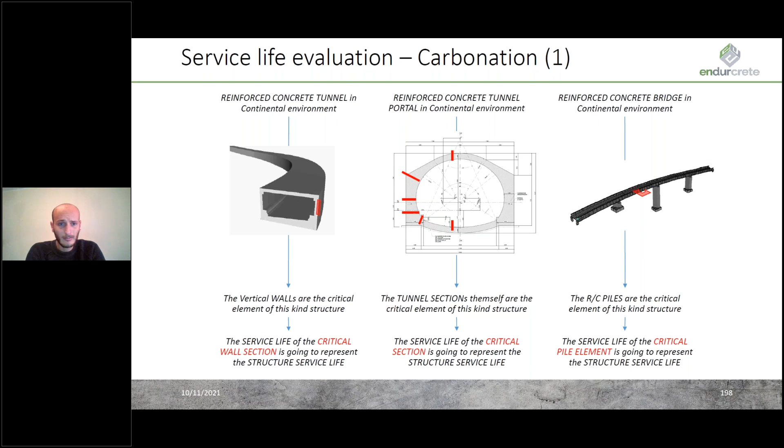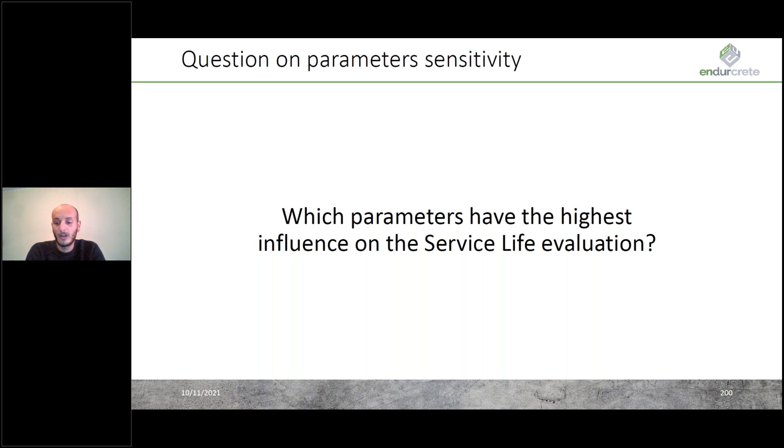For the carbonation case, we can see that the influence can go from high to fundamental for all these 3 different parameters. This is simply related to the fact that the 2 mechanisms that play the fundamental role in carbonation are the rate of corrosion and the penetration of carbonation, which in terms of time are basically the same.

While for chloride penetration, we can see that only the concrete cover shows a fundamental influence on the evaluation of the service life. This is related to the fact that the corrosion related to chloride penetration is very high, so the time needed for the corrosion can be seen as negligible with respect to the time of penetration of chlorides. So since the concrete cover is the main parameter that can influence the chloride penetration velocity, in this case it is the most important one.

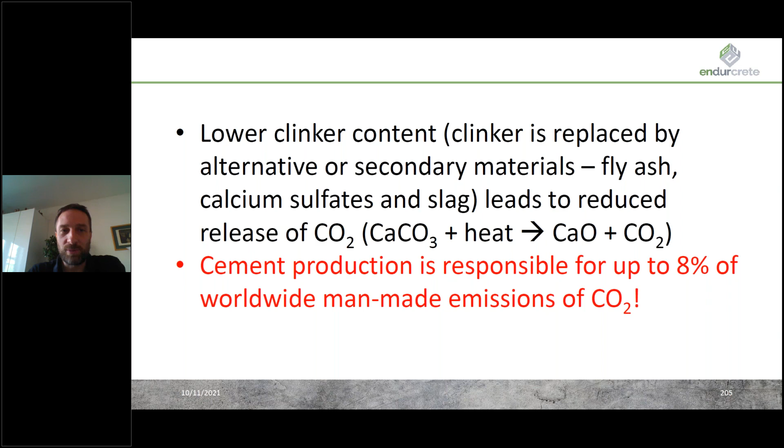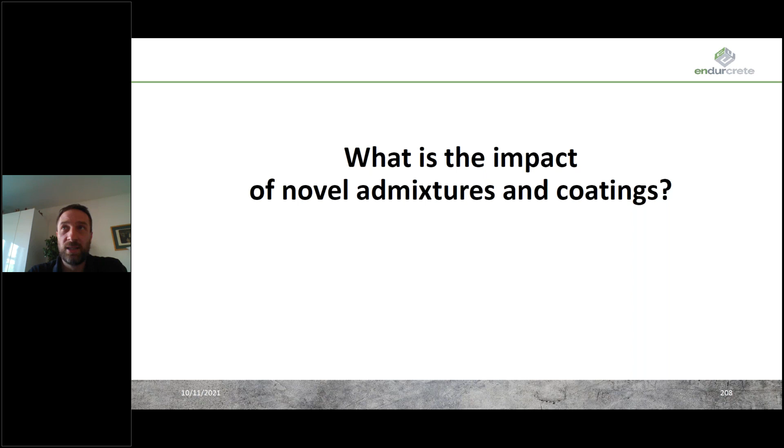And now to the alternative materials, novel admixtures and coatings. I will not present here the detailed results, but we can say that the environmental impacts of these new materials during the production phase only are slightly higher, but if we consider the whole life cycle and the extended durability, their use certainly makes sense, because the extended durability leads to significant reduction of all environmental impacts and also costs. So this will be summarized in the final deliverable of the project, which will be due in December. I can say that this has been confirmed by our calculations, and also the recyclability of EnDurCrete concretes was analyzed, as already presented by Cecil.

Recyclability analysis was also performed by Vito in terms of performance of the recycled materials, and similarly to the results of the partner ReSHEALience project, we can say that these new concretes can be fully recycled in the same way as standard concretes. So that's all from my side.